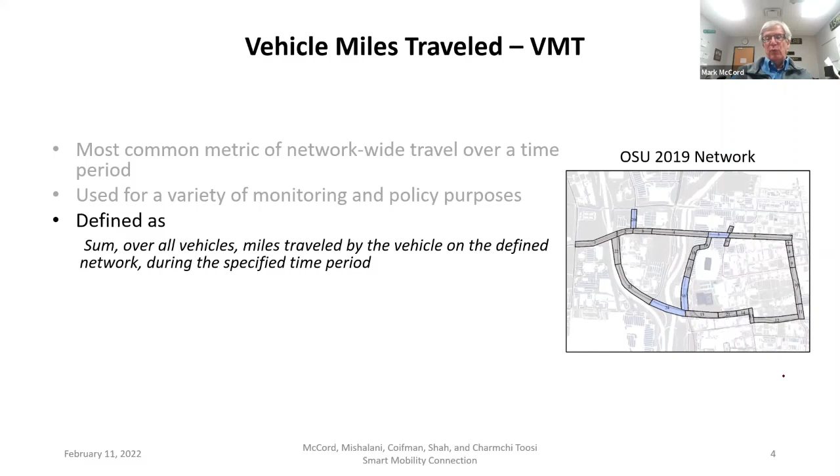By definition, VMT is the sum of all the vehicles miles traveled on a roadway. So if I were to look on this network of roadways here, and I was going to look over a year, for example, I would say, look at every vehicle that traveled on this roadway. How many miles did it travel on any of the roadways in this network? And just sum those up over all the vehicles. And that's the vehicle miles traveled.

That's hard to get. And so we usually calculate VMT as going to a segment, figuring out the segment length, and then figuring out the traffic volume. How many vehicles use that segment over a year, for example, if I'm talking about annual VMT, multiplying the volume times the length and summing that up over all segments in the network. That's the mathematical equivalent. I tell my students it's not the definition of VMT, but it's the mathematical equivalent. So we get every segment, we get the length of the segment and the traffic volume on the segment, multiply those together, add them up over all segments.

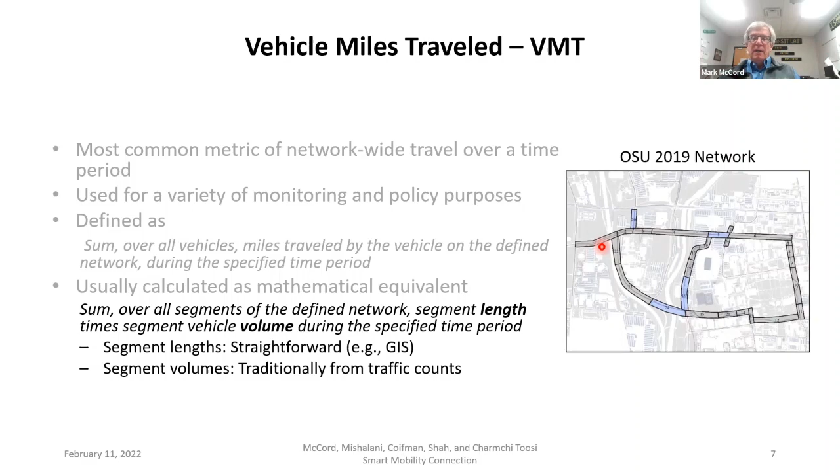Getting the length of the segment is pretty straightforward. We've got GIS, we've got ways to measure things immediately now, online lengths of segments. So that's straightforward. The tough part is getting the segment volumes over the time period you're interested in. And traditionally, we do this with traffic counts. There are different ways we try to estimate volumes, but traditionally it's traffic counts. And the traffic counts are usually done in a traditional way. We've come up through this project with a different way to estimate traffic volumes, converting observations on a segment to traditional volumes. And that's what I'm going to review quickly here.

But either way, whether we're doing manual counts or road tubes, I like to say we go out there and we stay there. We're staying there over time at one place, for a long period of time. And these traditional traffic studies get obviously very good estimates of the volume. There's always measurement error, but very good estimates of the volume over long periods of time because the people are out there. But they only get them at the place where we put down the road tubes or the person's out there. And they only get them if we send people out there or pay for the road tubes. And so we get it at limited locations of our network and on a very infrequent basis.

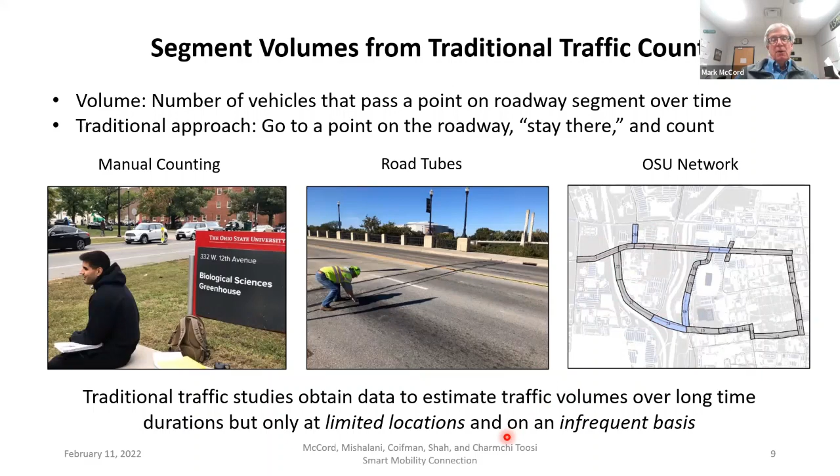We came up with the idea that buses travel all around an urban area. So they're covering the expansive roadway network, and they do it on a repeated basis. And at the same time, buses are increasingly being equipped with cameras for safety, liability, security purposes. I like to call it other purposes. The cameras aren't out there to do traffic counts. They're out there in case the bus is in an accident, who was at fault. If there's a problem on the bus, can we maybe see what's going on and get some security there?

We said, since these cameras are out there, we noticed that they see the roadway out there and they're seeing vehicles out there. And so we said, can we take advantage of this existing imagery, the sensor, the cameras out there? You don't have to pay for it. The platform for the sensor, the bus, is out there because it's transporting people back and forth. So we have the platform and the sensor, we have the data.

Can we take advantage of this stuff that's out there for other purposes? We don't have to pay for it and come up with traffic counts. And that's the basic idea. Now, hopefully you can see when a bus traverses a segment, contrasting with the traditional approach where someone goes out there, a road tube goes out there for 3 days and counts traffic over 3 days, we're going to get one individual pass of a bus, maybe a minute to go over a traffic segment. It's going to be a very short observation.

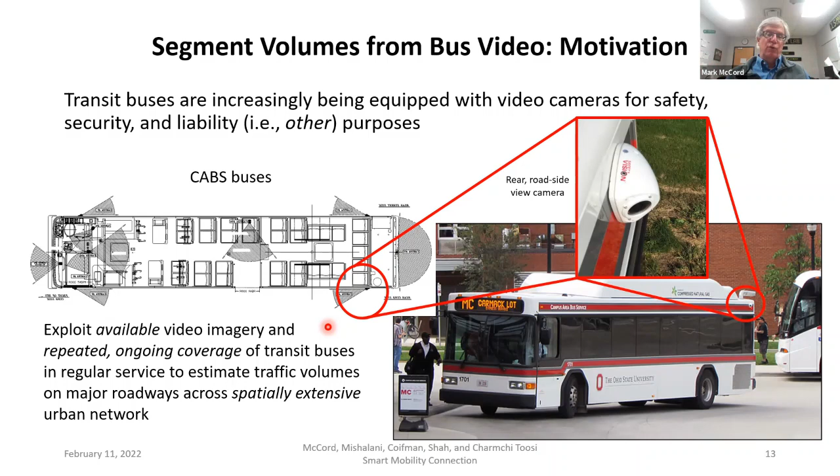So, the state of our practice of this approach right now is we get the video from the buses and we convert this imagery to digital information. At this point, we're doing it, I call it semi-automatically, but it's got a lot of human intervention here. We have a MATLAB GUI, a graphical user interface. When a vehicle goes by, we press a button.

Those frames that we record, we post-process using the methodology we've come up with that transforms the observations of vehicles we get from what we call this moving observer into a traditional traffic volume. And again, we've presented this before, but let me give you a quick review. A traditional traffic volume would have an observer here, this eye at some spot, and just counts the traffic coming past this location on the roadway over time.

Our approach says, here comes the bus going this way. We're going to see the vehicles coming in the opposite direction. And so the observer would sit here and count the vehicles, and then it would say, how long was I out there counting the vehicles? And that would be the volume, the number of vehicles per that unit of time, upgraded to how much time we want the volume for.

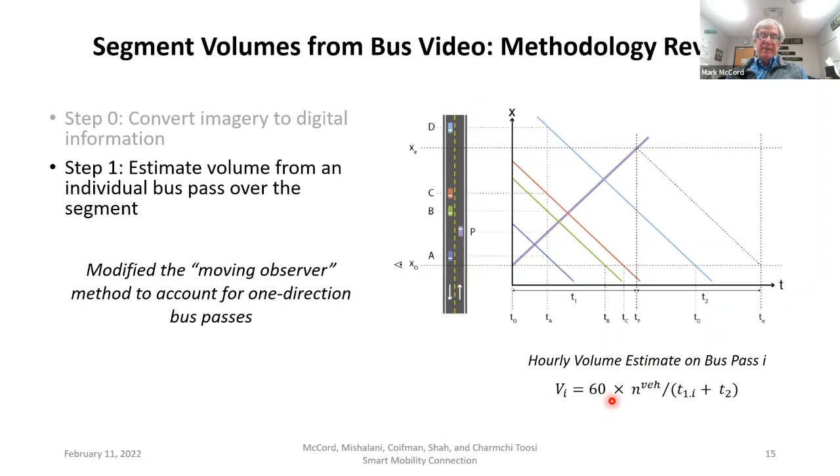But again, the idea is we're going to have multiple bus passes within that hour, and we want to aggregate these bus passes. So for example, one bus goes past and uses our calculation to come up with V1 during the hour. Another bus goes past the same segment, either multiple buses on the same route or different routes using the same segment. It gets an observation that we convert to V2 for the hourly volume. The mth bus pass during the hour gets an hourly volume VM, and somehow we have to aggregate those.

In our previous presentations, all we did was simply take the average of these and say that's an estimate of what we would have seen with a real observer out there for my hourly volume. That's what we've been doing before. We have a few more methodological changes to the video-based volume estimation that we've made since last time. Some we're working out, sometimes they work, sometimes they don't, but there's two I'm going to present here that definitely look like improvements.

There we go. So here are the steps. First, we convert the imagery to digital information. In a side project, we've been working on automatic image identification. We're not there yet. We don't have anything to report. We're making some progress, but right now we're still using our GUI, our graphical user interface.

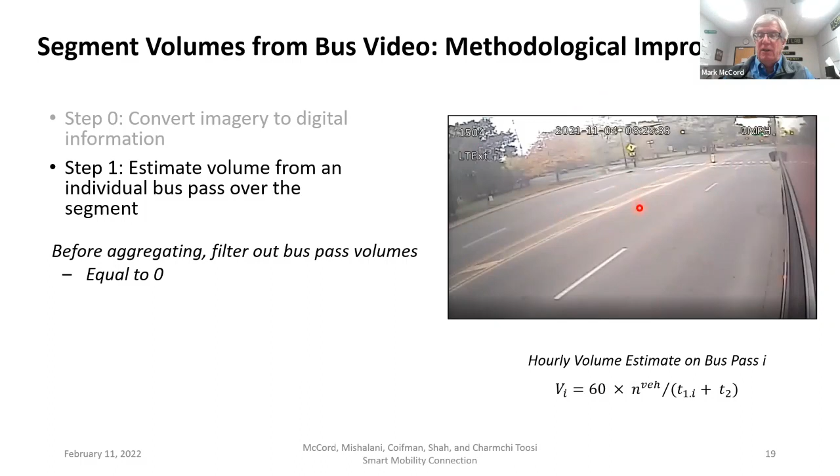But remember, the next step was on an individual bus pass, we estimate with this equation what the hourly volume was. And we noticed that there are some bus passes, because we're only going by for maybe a minute of observation, where we don't see any vehicles, n equals 0. So that would result in an hourly volume of 0. And we know that's a silly estimate because we know there's going to be traffic out there, even if it's one vehicle. So right now, we filter those out, we throw them away. We say, we're not going to use this individual bus pass. Next time the bus goes by, it may see some vehicles and we'll use that one, but we're not going to use bus passes with zero.

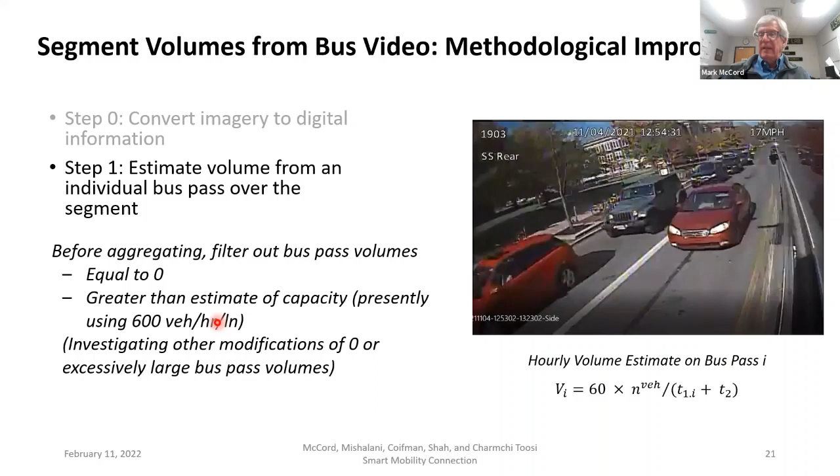Now, as I said, these are the two I'm going to talk about with empirical results. We're investigating other modifications like how to use the zero and not completely throw it out. It's information. How to use that there was a queue, not throw it out. That's information. Haven't really nailed that one down yet, but the one is to filter these out, and you'll see that leads to improvements.

The second change we've made is, right now we have to aggregate all of these different bus passes. So the dot here is going to be a bus pass at this time that led to N vehicles in T1 plus T2. That would be our estimate. And then we multiply by 60 to get an hourly volume. But we're going to forget the 60 for now and just call this a flow rate in terms of, let's say, vehicles per minute. So we're getting all these flow rates over time.

And as I said, traditionally, if I were to look between 7:30 and 8:30, like an hour, I would take all the bus passes within here, get the individual flow rates, average them, and that would be our estimate of the hourly volume, multiplied by 60, of course. Now, that's not accounting for temporal variability within the hour, and there's some other aspects that I won't go into today to keep the focus on the VMT. But we said it makes more sense to think if this is a flow rate, the actual volume is going to be the integral of the flow rate over time.

And so what we're doing when we're actually taking these flow rates and just getting an average over the hour, we're just sort of getting the integral, the area under the flow rate curve that looks something like this. We're going to explicitly take into account the temporal variability at a smaller time span by basically getting a flow rate curve. Right now, we're using linear interpolation.

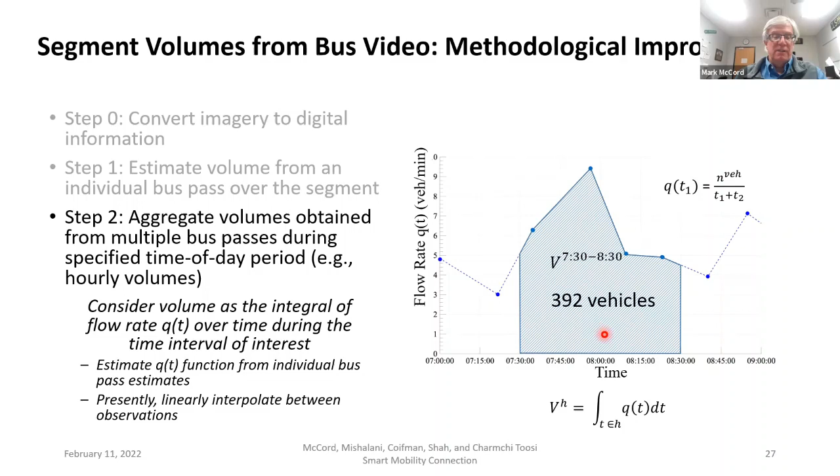So each one of these is a flow rate. And so we're just going to connect it linearly, and then we're going to integrate over time. So now between 7:30 and 8:30, rather than take the average of these guys and say that's the volume, we're going to integrate under this curve and actually come up with the volume. And again, you'll see in a second that that leads to better estimates.

So let's talk about the empirical results. So as part of what we do, both for research and, you'll see, for educational purposes and for outreach purposes, we collect data, and on some days we can get road tubes out there to simultaneously collect the actual volumes over there. And so what we're doing here is we're looking at a bus goes over, gets the volume in an hour, and at the same time there's a road tube out there and gets the volume in the hour. Let's take the difference of those two.

We're going to assume the road tube is correct, but those of you who deal with road tubes know there's measurement error in those too. But we use the road tube as a basis. We'll say that's sort of the error in our video-based estimation. And what we'll do is we'll take the difference in that and then take the absolute value just to get a magnitude of these differences.

And so over 100 segment direction hours in 2018, the average magnitude of the error was 65 vehicles before we did this filtering of throwing out the bus passes with zero volumes and those with overcapacity. After we do the filtering, it goes down to 56. In 2019, we had 80 segment direction hours of data. The average before we did the filtering was 116. After we threw out the bus passes with 0 volumes, or where we saw queues, 100, etc. Similarly,

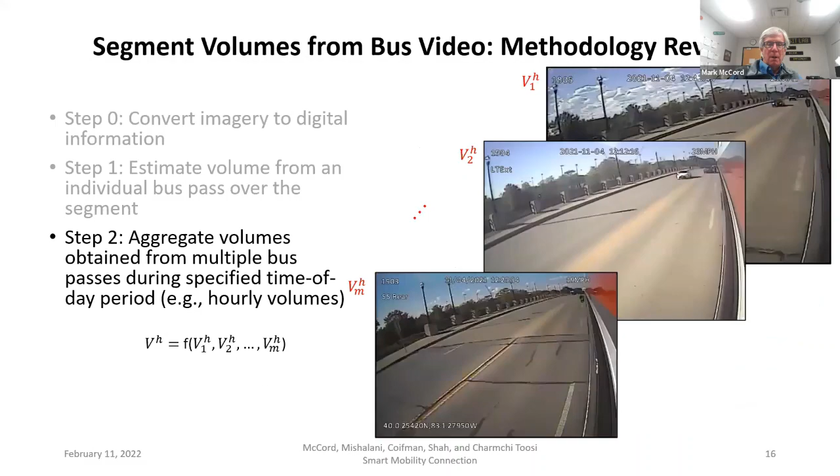Buses are in an urban area. In an urban area, most of these places are going to be two-way streets with buses coming in both directions. So when they only go one direction, we'll only get one direction, but traffic monitors have directional splits they could use. So getting information in one direction will be helpful, but most roadways will be two direction and buses are going in different directions.

Okay. Would your system work in extreme situations? For example, during a football game? During a football game, I don't think people are going to be too interested in the traffic volume on the roadway. They'll be interested in where the queues are, how long the queues are. I would say this isn't targeted for those conditions. One, because getting the queues is different than just estimating the volumes.

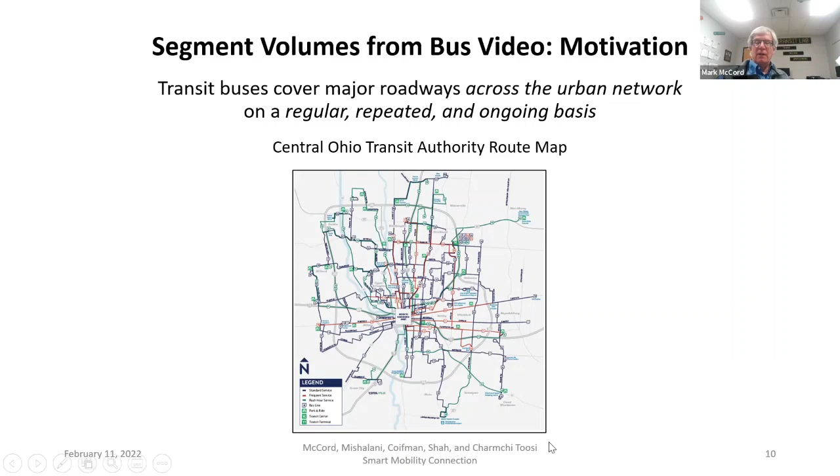Two, during the football games, the vehicles are not traveling over the whole network. They have very specific routes. The buses would not be traveling over this whole network like they do here. They come down this way and travel this way. So no, this would not be designed for that. One, because the buses aren't in regular operations during football games, and two, because the queues would be a bigger problem at that time.

Okay. What are you finding is the biggest challenge in this field at the moment?

Are you finding that COVID is making it harder to get information and is throwing things off? Or what do you think the biggest challenge would be? COVID's no problem, because as long as the buses are out there, we can get the information. So COVID's not affecting. That's the beauty of this. The buses are out there getting the data for different reasons.

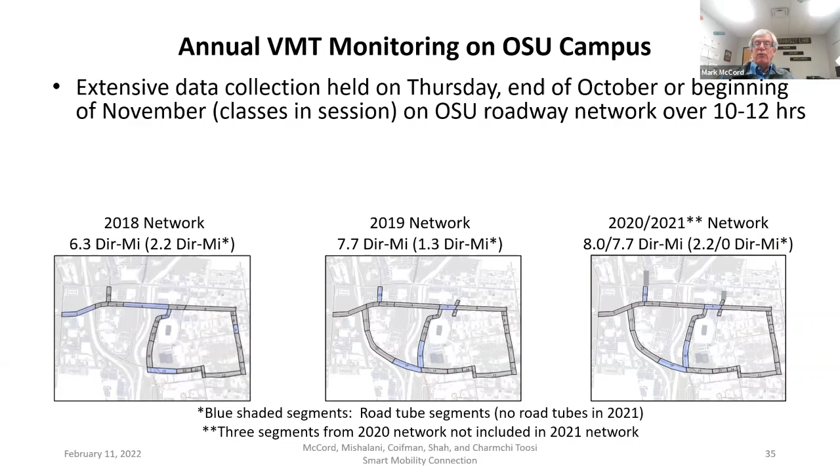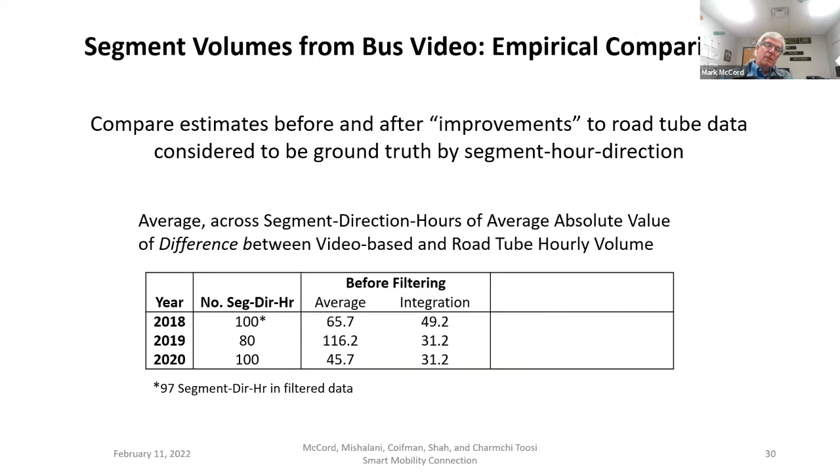If you were to say, what's the biggest challenge to making this operational? I would say the biggest challenge to making it operational is being able to translate this imagery effectively to get the cars. Right now, we get the video and we put this in MATLAB and we can run it at 2

or 3 times speed, but we have relatively inexpensive undergraduates sitting there pressing the buttons, counting the cars. That's still very labor intensive. The biggest challenge would be getting an automatic vehicle identification that says, this goes by, there was a vehicle here. That, to me, is the biggest challenge to make it operational.

Okay. What is your favorite part about doing this research? Well, that's a good question. I couldn't tell you favorite. Here's parts I like. One, in the introduction, thank you for introducing me that way. I like to say there's stuff out there, in this case, video, that's out there for other purposes. Can we be clever and use existing data that we don't have to pay for to come up with novel applications? And so I like doing that. And it's really cool when the results look so good. So I really enjoy that.

I love the fact that we do this on our campus, so we get to work with the transportation and traffic management group who runs the buses on campus, and they say, hey, this is cool, we'll help you out. So I like those interactions.

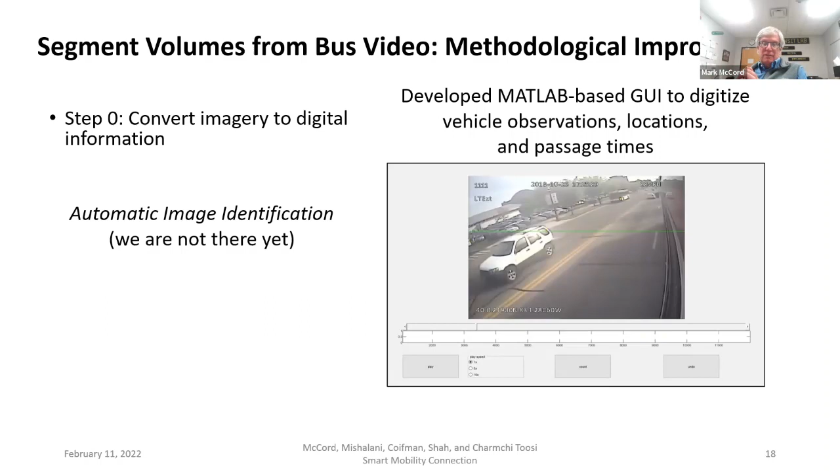But for my career in research, I didn't start out trying to do traffic volumes from video. Applications change, and so there's some basis to research that you learn, but you got to be flexible to the applications. And again, my cynicism is, I see in the university, we often hire people that do one thing because they can do this one thing really well and make a career out of it and tweak the edges. But applications are going to change.

And I never foresaw this. I never foresaw probably the 5 or 6 different big applications I've done in my career. They weren't something I envisioned. So be open to new applications, get the methodological skills and sort of the data analysis skills, those things are transferred. Seems like that's good information for life as well as careers and research.